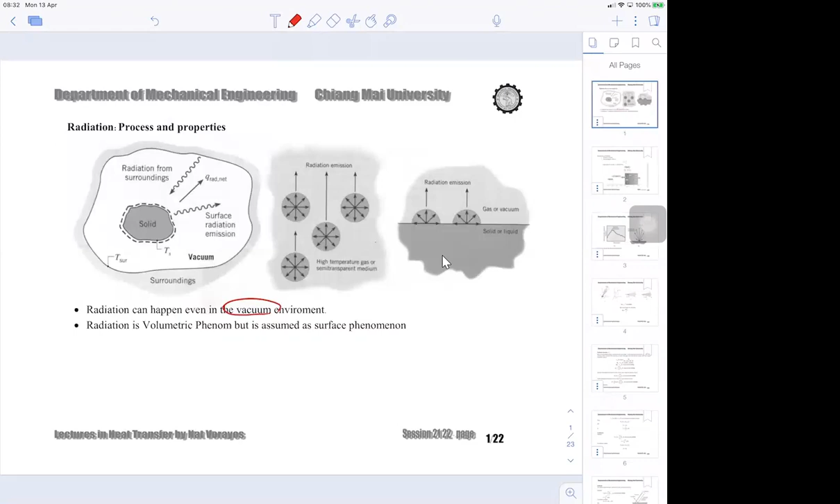Radiation process can happen even in the vacuum. Radiation process is actually a volumetric phenomena, meaning every element of the subject can radiate. But in this chapter, in this class, we're gonna talk as if it was the surface phenomena. So there's gonna be no radiation from the inner side of the object.

The radiation is going to be radiated from the surface only. Even if you have a 3D object, it's going to be represented as the surface. So surface can radiate.

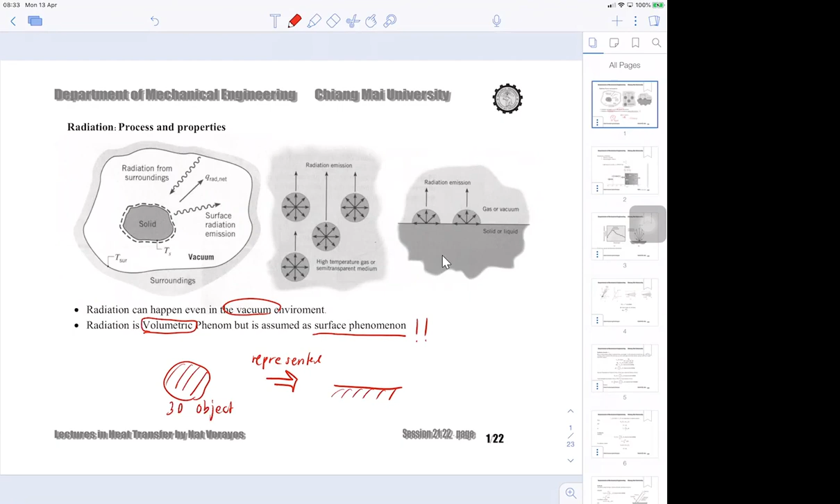The way it can travel through space without a medium is that the radiation, the energy transforms itself into the electromagnetic wave, and then when it arrives to destination, it's turned into heat. So the whole process is called radiation. It has to be the conversion of the energy into electromagnetic wave, and it's going to be the electromagnetic wave converted into the heat.

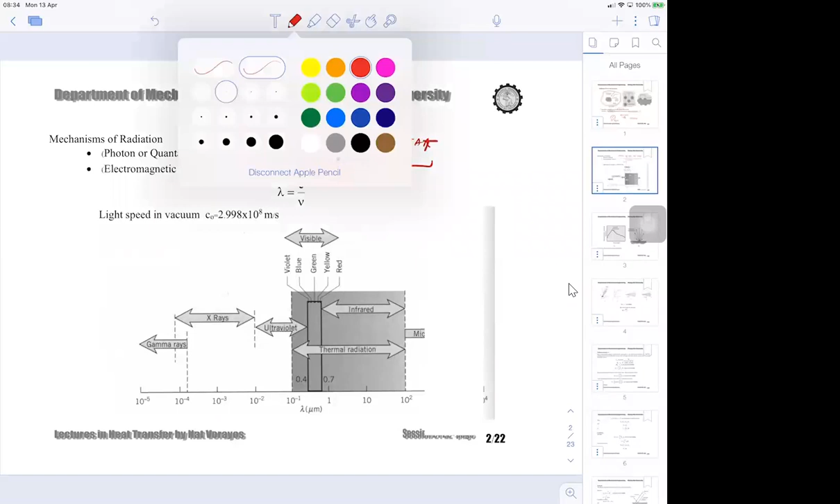So it maintains all kinds of the properties of the wave. It has velocity, it has the wavelength, and it has the frequency. A number of frequency or wavelength can be transmitted from the subject itself. So the number of wavelengths that we have, it's so many. We call this property the spectral.

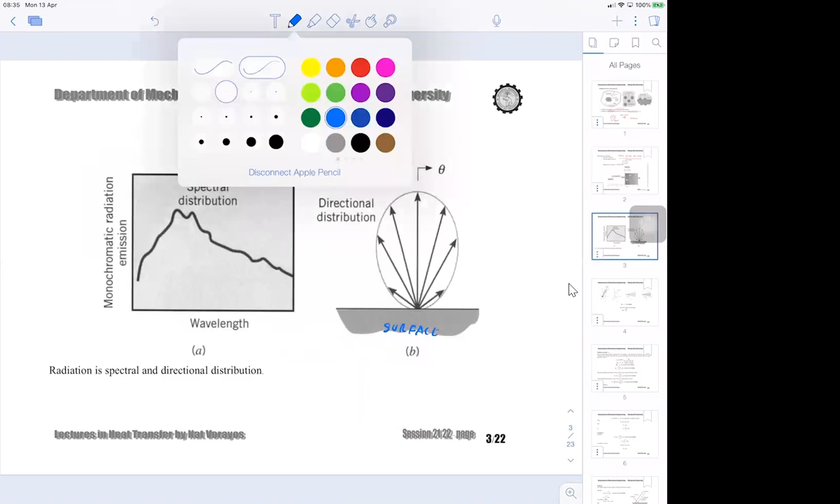So we talk about the direction of the distribution too. For example, this is a surface, and one point on the surface itself can radiate, sending out energy in many directions. To say the truth, it is in every direction upward into the surrounding medium, and the amount of radiation can vary. It can be maximum in this direction, minimum in that direction.

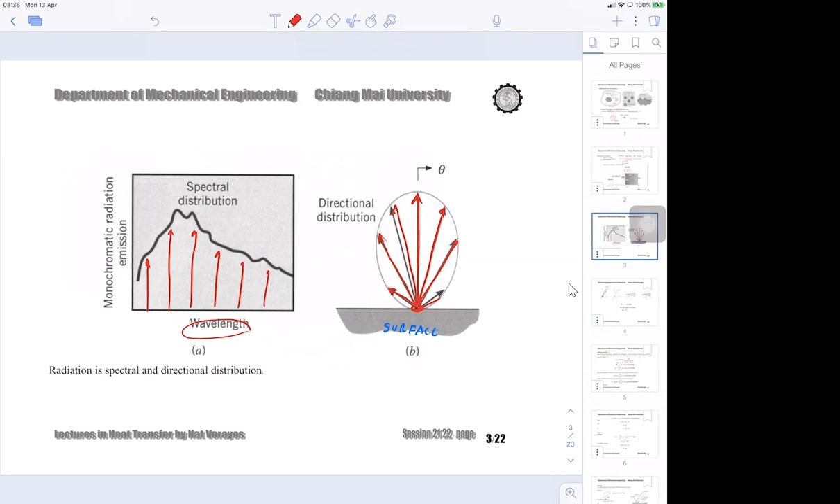It can vary in terms of wavelength too. The intensity of the radiation is on the y-axis, and the wavelength is on the x-axis, so it can vary.

And we define the radiation intensity - this is the emission. When you have a surface at temperature Ts, and Ts is greater than 0 Kelvin, it always radiates energy out. We would like to measure that energy - that energy we call emission.

So we specify what's called the radiation intensity, which has a unit of watt per meter square per 3D angle, which we call steradian, and per wavelength.

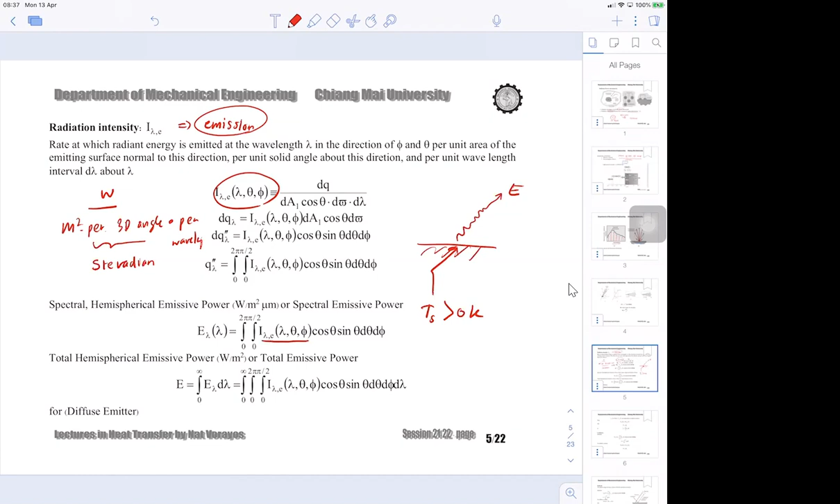So when we make the integration over the intensity - for example, this is the intensity - we make the integration in every direction. This is a concept that we talked about last time. This is the integration of intensity.

Integration of intensity to sum it actually, to sum our intensity in every direction. If we do the integration like so, what we're gonna have is not just intensity in one direction or one wavelength, but in every direction. This is energy emitted in every direction.

But still, the energy that we carry out from the integration is going to be specified at one lambda. If you want to make the integration once more, you can take this energy in one wavelength under another integration. Now it's going to be integration from 0 to infinity of lambda, meaning you can study the radiation of the energy in terms of emission from 0 to infinite wavelength, including all wavelengths. This is energy in every direction and every wavelength.

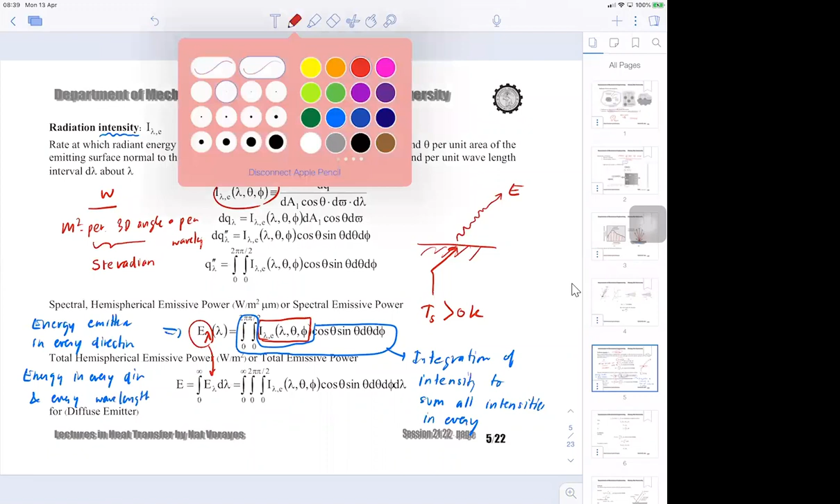So you're gonna have the equation which is important - this equation.

And we talk about the diffusive emitter - that's a whole other concept. I would not go into the detail because we already talked about it last time. This is a quick recap.

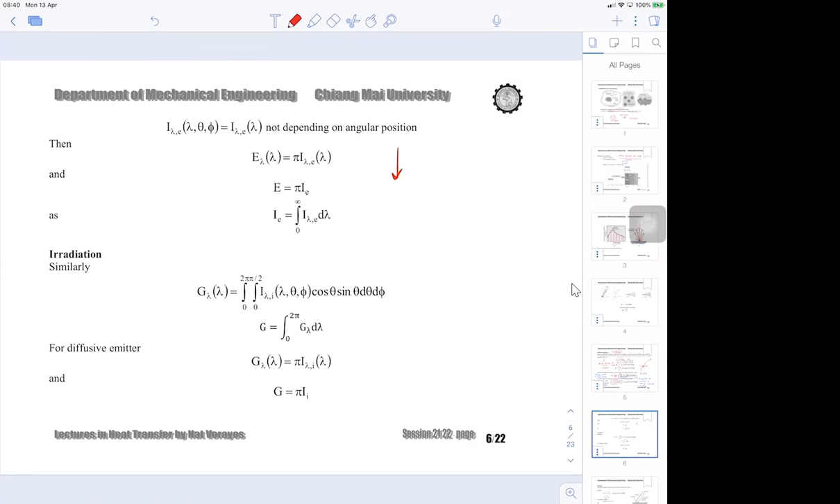Another phenomenon in addition to emission is irradiation. We use the concept G, the symbol G, and we use G lambda, meaning that it is irradiation onto an object at one particular wavelength.

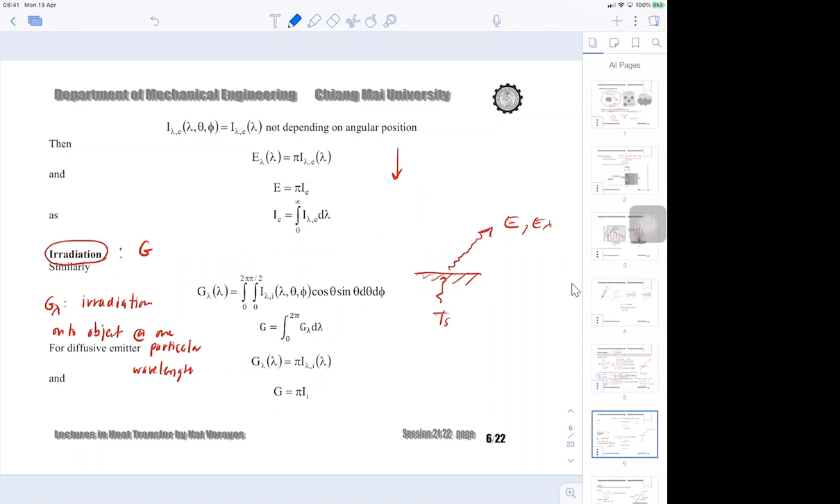What is the irradiation again? If you have a surface at Ts, of course you can have emission. But the surrounding or another object is going to have emission too, and part of that emission arrives at surface Ts - this is G. You can study the radiation arriving at the object in terms of G, which is the irradiation in every direction and every wavelength, or G lambda.

G lambda is the irradiation in one wavelength. But G is every wavelength. So the important equation would be that.

And then we talk about radiosity. We use symbol J, and we have J lambda. Similarly, it is the quantity measured at one wavelength, and we have J, which is the quantity measured in every wavelength and in every direction.

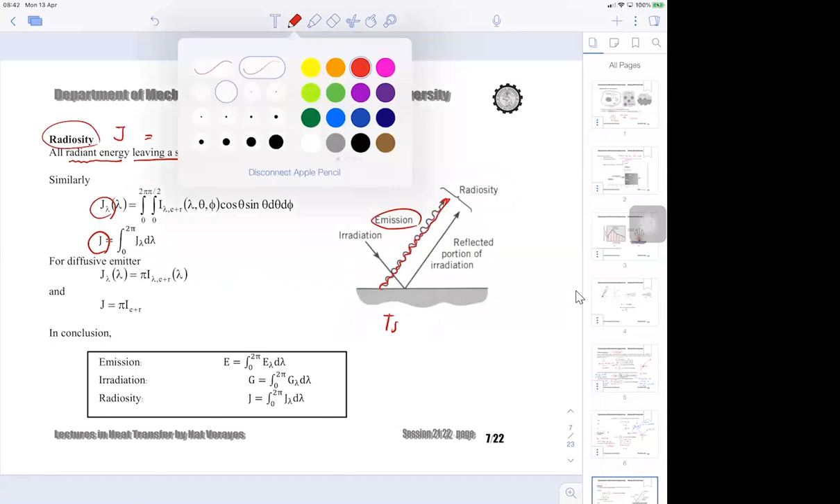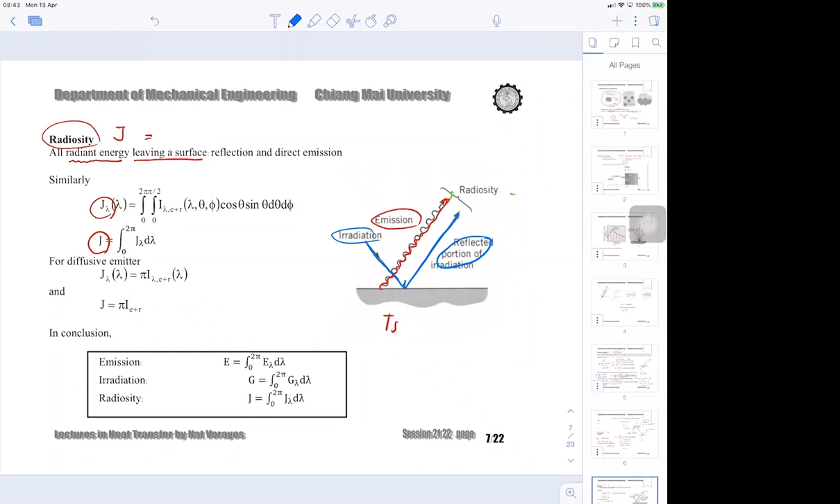We're going to have the radiation and it's going to be reflected. So the summation of emission and reflected radiation, we call it radiosity. As you might guess, the important equation would be something like that. So in conclusion, emission can be found from this equation, irradiation can be found from this equation, and radiosity can be found from this equation.

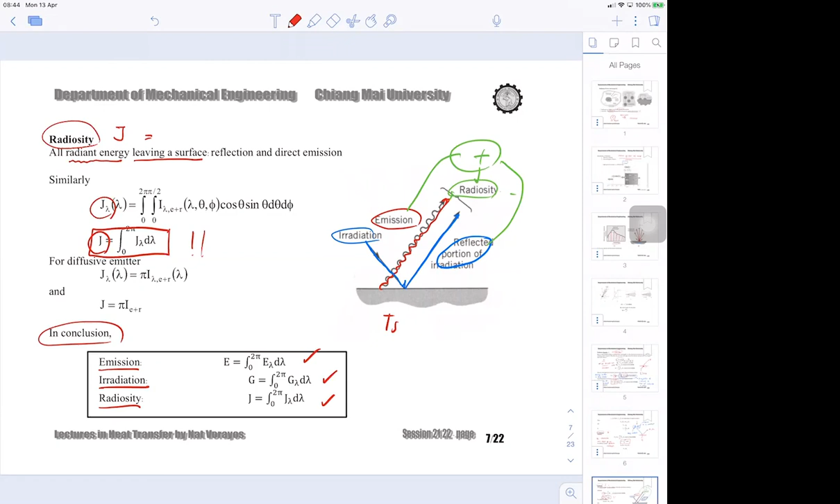And then we get back to I lambda e. This is the emission intensity. Because when you have a surface and the surface itself is at temperature Ts, you need to find the emission intensity in order to find how much the emission is, using this emission intensity in order to find the whole emission, or at least you would like to find E lambda.

So I give you the radiation of black body, because the black body itself is the ideal material. It can absorb all the incident radiation, 100% of the radiation onto it, in every direction, in every wavelength.

When you talk about the emission, if you have two bodies, one black, one real, and they are at the same temperature, when you measure the emission out of these two, the emission from the black body would be the most. No real body can emit energy more than the black body if they are at the same temperature. No surface can emit more energy than black body. Black body is a diffuse emitter.

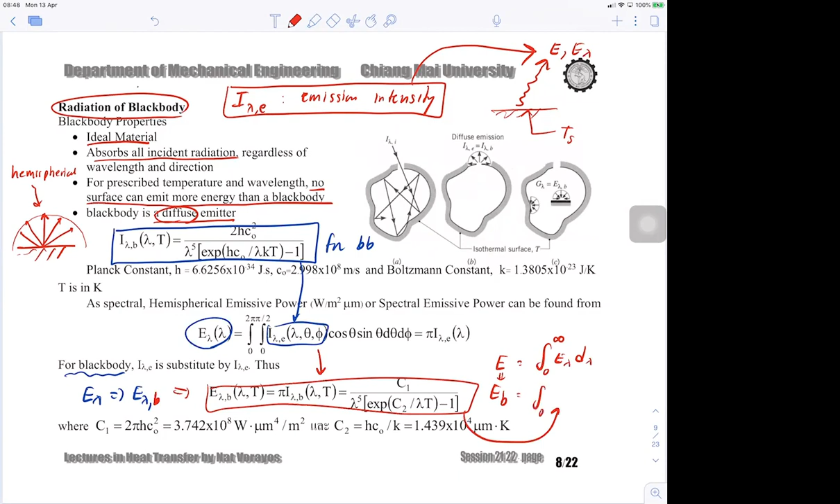This equation becomes this, because you know, if you want E, it's the integral from 0 to infinity of E lambda d lambda. So for black body, EB, we call E for black body by putting subscript B in, meaning this belongs to the black body. It's equal to the integral of something like this, and after the integration, this is what you have. So EB equals sigma T to the fourth.

And then we define the ratio of emission from wavelength 0 to lambda, meaning that we're going to find the amount of energy from 0 to lambda of E lambda B. Basically this is EB, but you don't make the integration from 0 to infinity. What does it mean? It's the part of emission from lambda equal to 0 to lambda equal to the amount you specify, in comparison with the same integral but from 0 to infinity of E lambda B, which is the whole emission in every wavelength. On the top is part of emission from wavelength 0 to some lambda.

So if you compare this ratio, we call it the black body radiation function, F0 to lambda, because the bottom is equal to sigma T to the fourth. On the top, it is the integral. You can take the sigma T to the fourth inside the integral, because this is the constant.

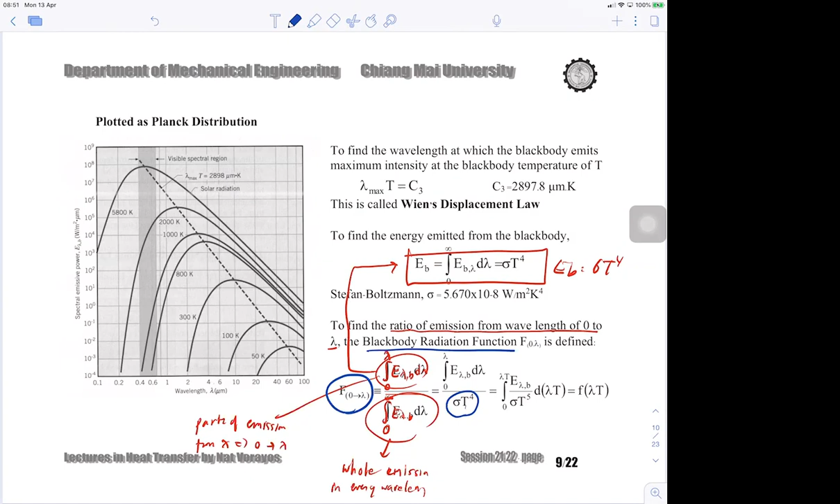Then if you want to find this ratio, you don't bother to make the calculation by yourself. It's already tabulated. So this is the table to find F0 to lambda. All you need to know is lambda and T. You find the product between these two, and see where you are. If you are here, you can read the F0 to lambda right away. And it happens that, let me write it down.

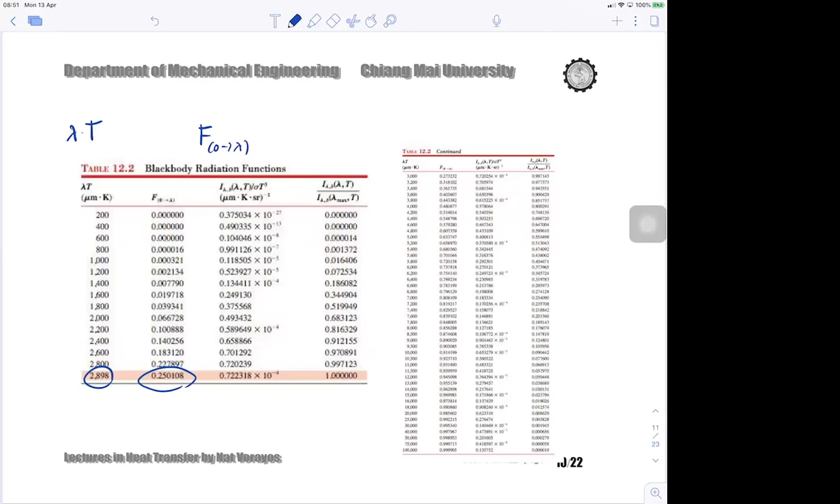Oops. Sorry about that. Okay.

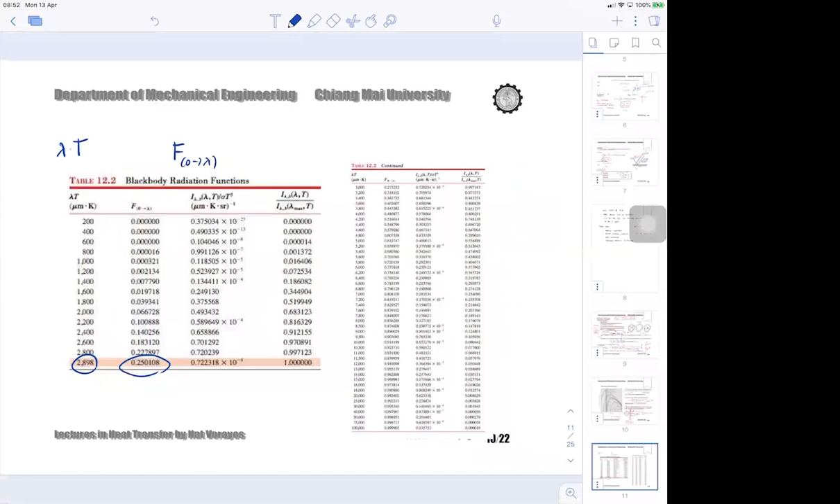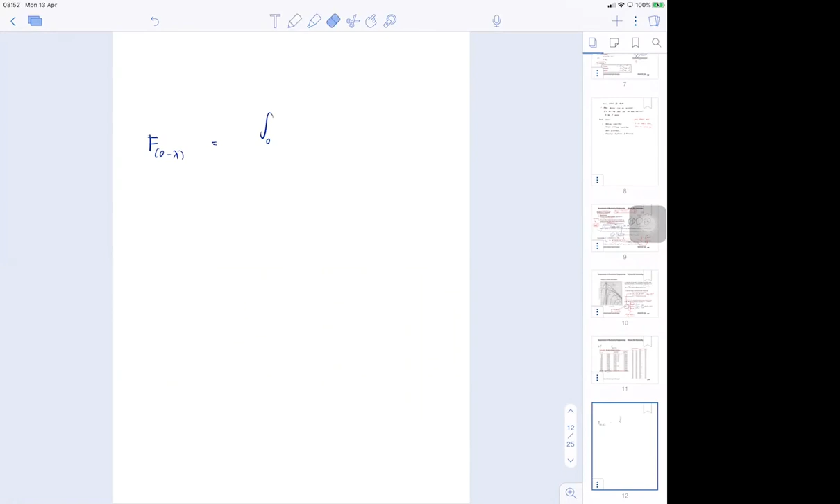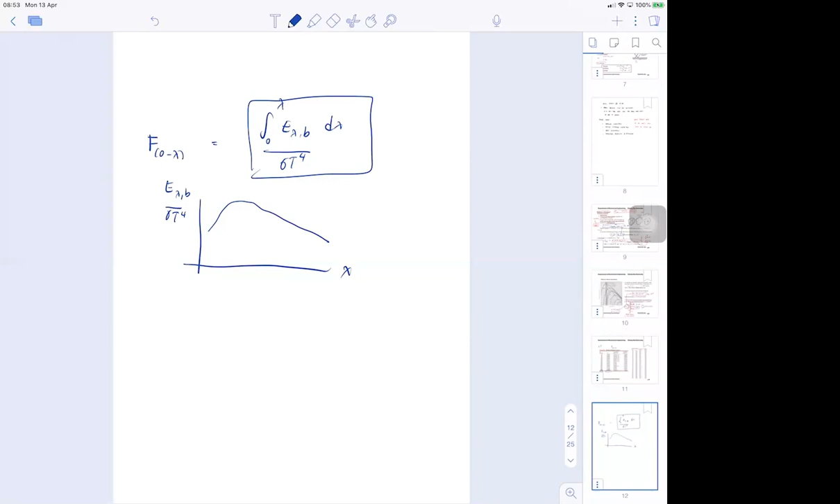Because when you draw the F0 to lambda, it is the integral from 0 to lambda of E lambda b d lambda over sigma t to the 4. Basically, it is the integral of E lambda b over sigma t to the 4, with lambda on the axis. If you have a property and the characteristic of E lambda b over sigma t to the 4, it looks like the graph shown in the sketch in front of you right now.

So this integral means finding the area under this curve.

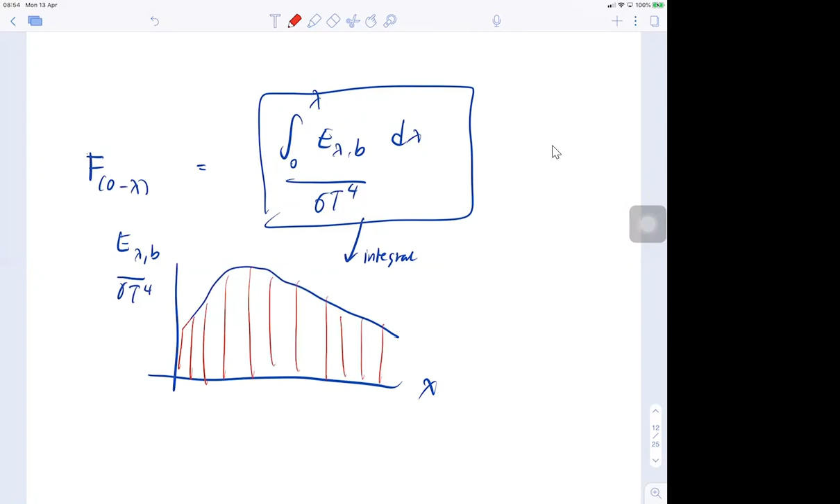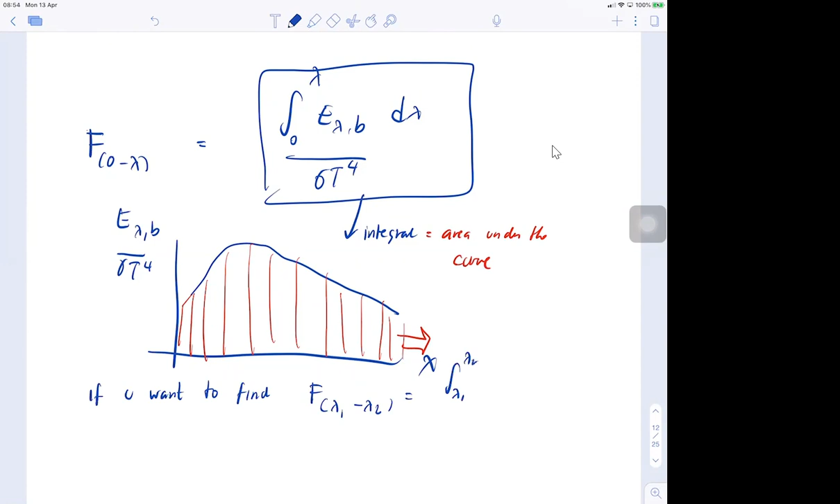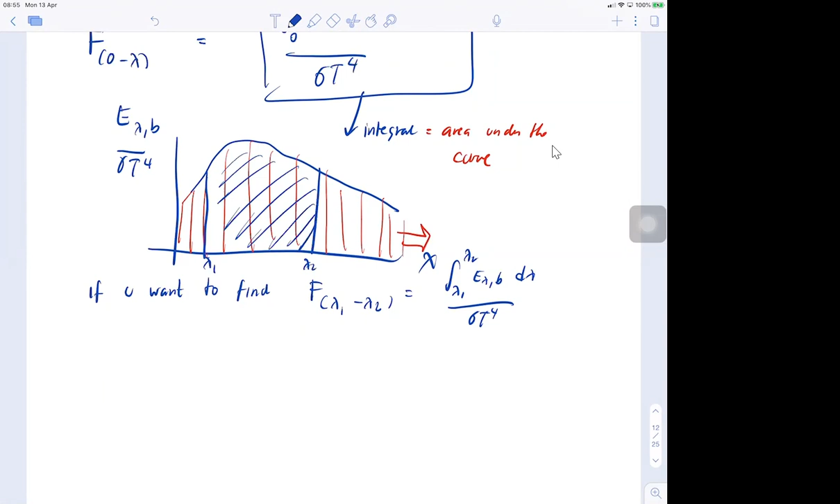Sometimes if you would like to find the F from lambda 1 to lambda 2, meaning you need a portion of the integral from lambda 1 to lambda 2 of E lambda b d lambda over sigma t to the 4, you're trying to find this portion between lambda 1 and lambda 2. How do you make that calculation?

You can do that by finding that f lambda 1 to lambda 2 equals f from 0 to lambda 2, meaning you find the area. Let me make a color code here: green from 0 to lambda 2. And then minus - I need violet here - f from 0 to lambda 1.

Remember, you want the blue area underneath the graph, but how do you find it? You need the green area first - where is the green area again? Green area is from here to there, from 0 to lambda 2. Minus the violet one, the pink one, from 0 to lambda 1. Where is that area again? Here, I'm sorry, here. So the green area minus the violet and pink area, what remains is the blue area. Is that what you want? Okay.

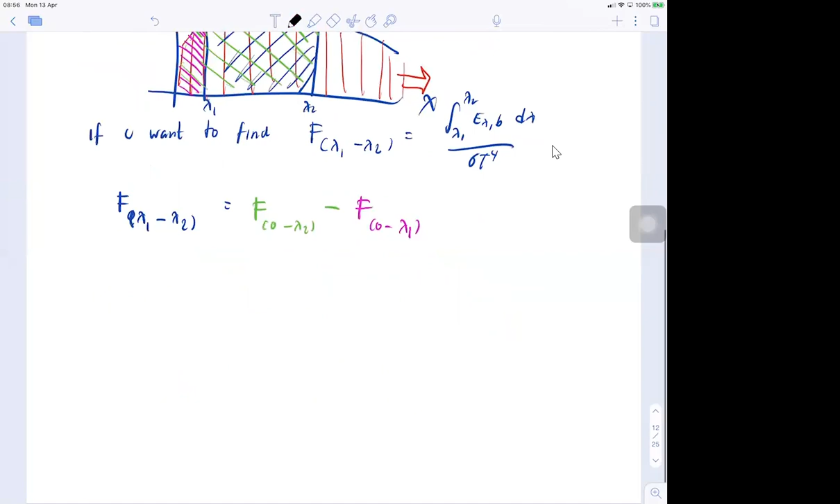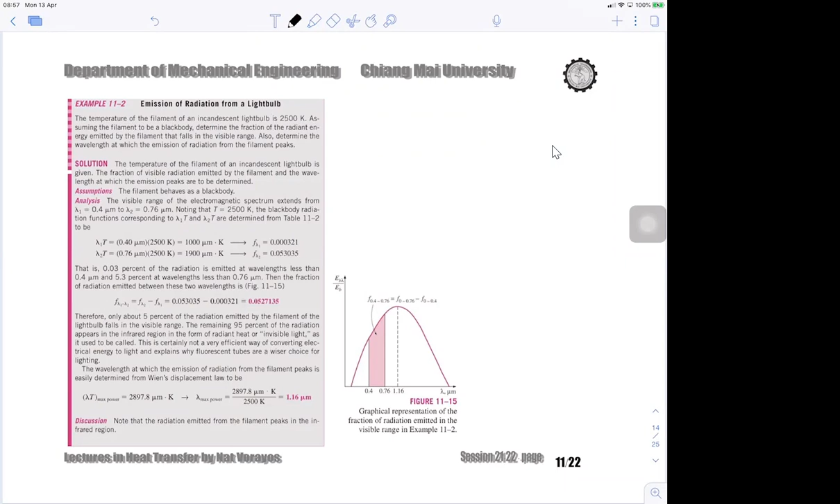We are coming to the example that you probably have in the book. It's called emission radiation from the light bulb. It gives the temperature of the filament of the light bulb as 2500 Kelvin, and you treat the filament as a black body. They would like to find the fraction of radiation energy emitted by that filament, for the visible range.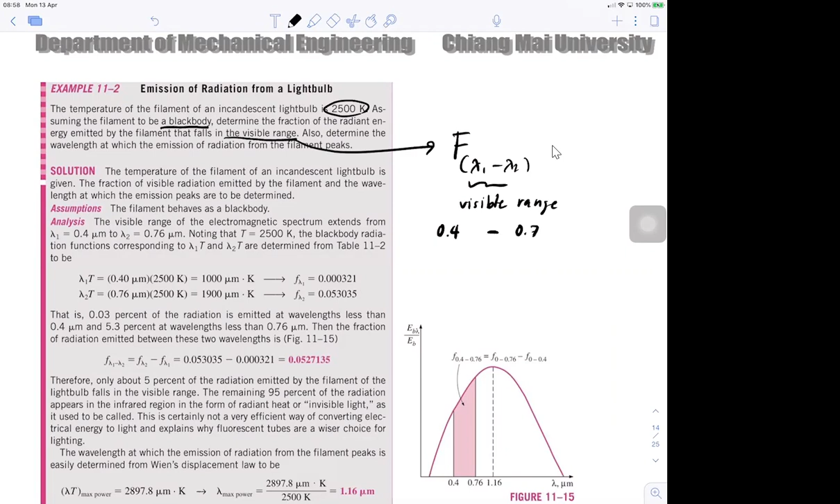So they need the F from lambda 1 to lambda 2, this is for the visible range, and the visible range starts from 0.4 to 0.7 micrometer. So if you have a graph like that, take a look at the graph on the bottom. The y-axis is EB lambda over EB, and note EB equals sigma t to the fourth. This is 0.4, this is 0.7, and you need the area.

So you need to find F from 0.4 to 0.7, which equals F from 0 to 0.7 minus F from 0 to 0.4. So in order to find these two, you need to find lambda 1 t for t's first, and lambda 2 t. I'm sorry, this is lambda 2 t and this is lambda 1 t. So lambda 1 equals 0.4 micrometer, lambda 2 equals 0.7 micrometer, right?

So they do it: lambda 1 equals 0.4 multiplied by 2500, this is what you have, and you use the table to read the fraction equal to 0.000321. And you find lambda 2, lambda 2 multiplied by t equals 1900, and the fraction is equal to 0.053035. Once again, you plug this in here and there, and you get the fraction. So the emission from the filament visible to your eyes is just a little bit above 5%.

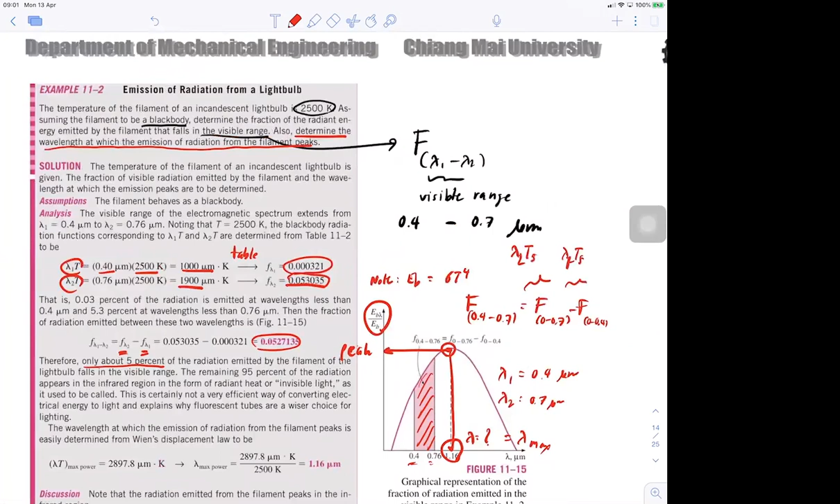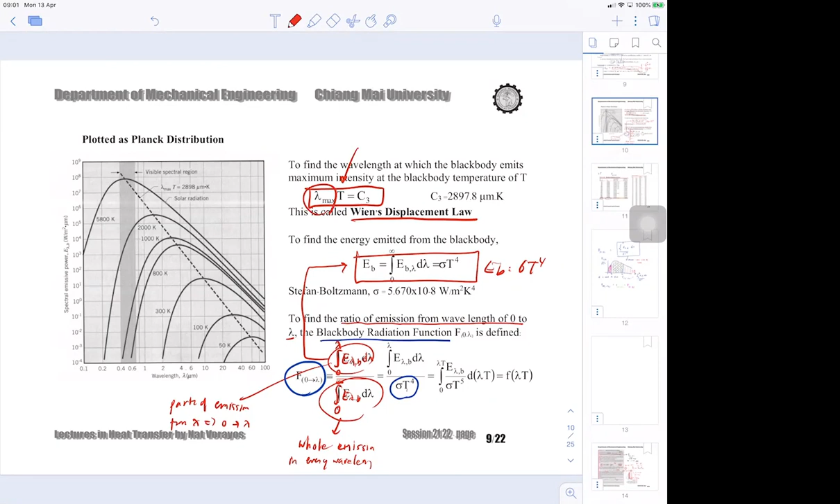In order to find lambda max, there is Wien's displacement law relation. In Wien's displacement law, you just plug t in here to get lambda max. C3 is a constant. So that is the example.

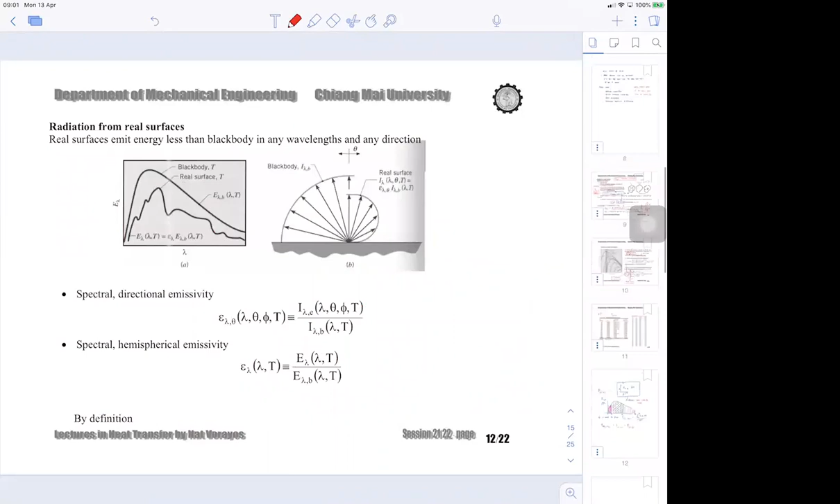And then if you take a look, get back to the radiation of black body again - we talked about emission intensity, but this intensity only gives you the case for black body. How about the real body? How do you find the emission from the real body? That's how we start from here: radiation from the real surface. You need to find, you want to find the emission.

E or E lambda, that's fine. Okay.

Last time when we talked about this, we started by identifying another property. We call this property emissivity. Emissivity is the property that compares the ability to emit energy over the ability to emit energy if the object is black.

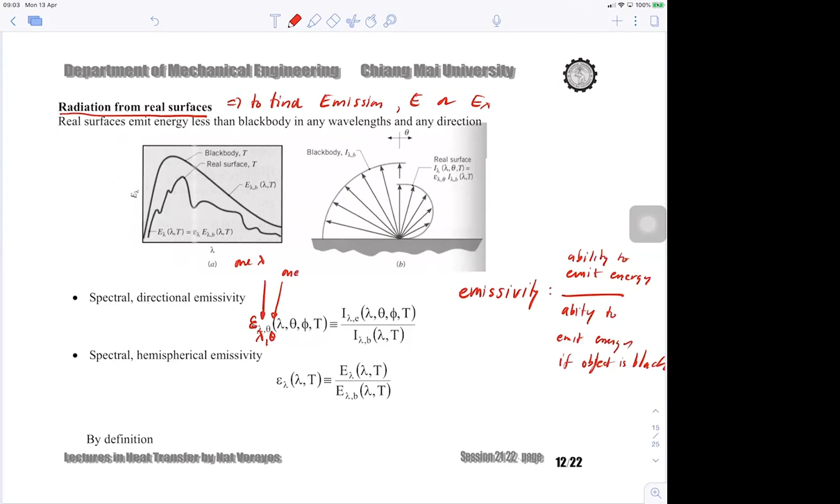So when you have emissivity epsilon with subscript lambda and theta, it means the ability to emit energy in one wavelength and one direction. You compare the intensity of the real body and the intensity of the black body together. If you study emissivity with lambda, this is the ability to emit energy in one wavelength, but in every direction.

And if you want to find just epsilon, with no subscript, this compares the emission of the real body over the black body, in every wavelength and every direction.

So from this equation, it's a comparison between E over EB. You know that EB equals sigma T to the fourth. If you want E, it's just epsilon multiplied by EB, meaning epsilon multiplied by sigma T to the fourth.

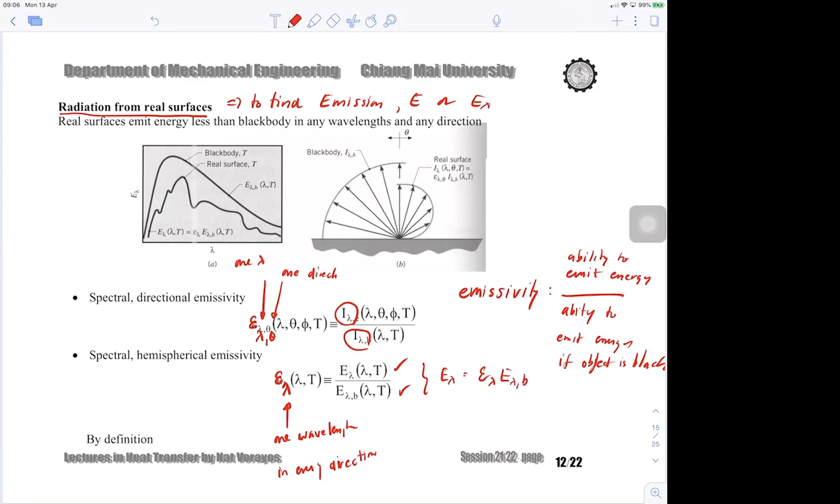How do we get this? From the last slide, this equation can be written as E lambda equals epsilon lambda multiplied by E lambda B. Remember this expression, and then the same thing.

Because we know that E equals the integral from 0 to infinity of E lambda d lambda, I just plug this in. I know E equals this, and I put it in here. This is what I have, and this one is sigma T to the 4. So my epsilon is equal to the integral from 0 to infinity of epsilon lambda E lambda B d lambda over sigma T to the 4.

If you ask me which one is important, the important part is this equation. You have to understand this point, okay?

Then, basically, epsilon most of the time depends on the wavelength. For example, take a look at this plot: on the y-axis is epsilon lambda, with subscript epsilon lambda n meaning normal direction. If you have the surface, this is the radiation in this direction, 90 degrees to the surface, and this is the radiation in terms of wavelength.

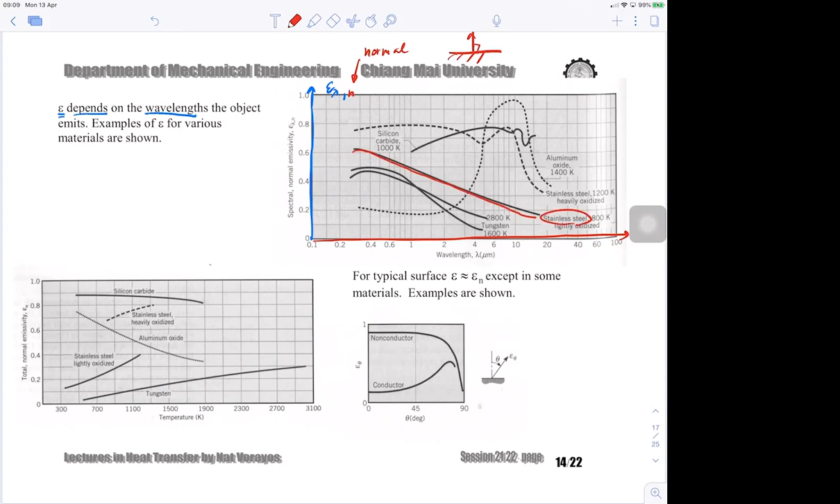So the amount of emission varies in one substance. For example, this is stainless steel: it emits energy at 90 degrees at every wavelength. At wavelength 0.4, at wavelength 0.7, this is the visible range, so they're not equal. But for a typical surface, we hold epsilon approximately equal to epsilon n, no matter how it varies.

You can browse the back of the book to check the epsilon for each material. Make sure you know how to get the number from the appendix in terms of epsilon.

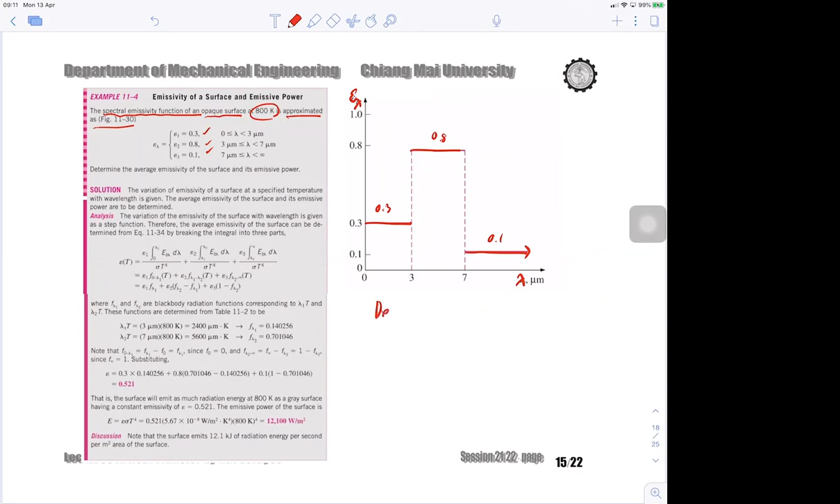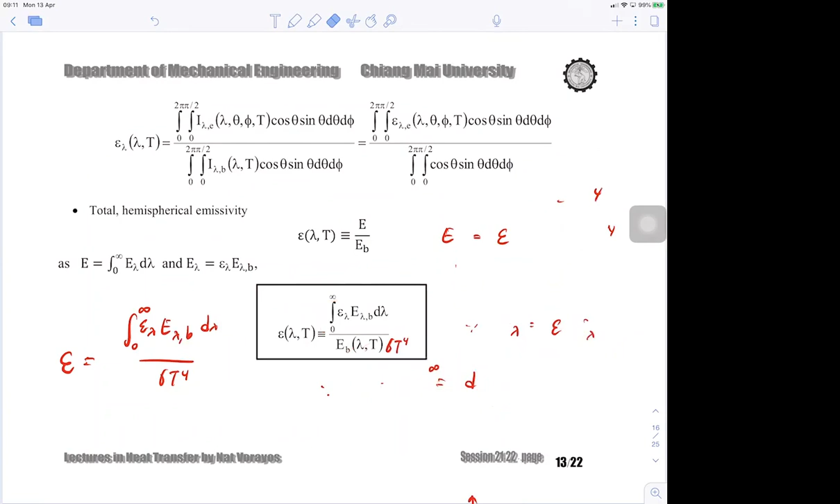So then they ask you to find epsilon, and also to find the emission. This is the emissivity, found by the equation - take a look at the equation. The emission is given by this equation. So in order to find that, let's get back to that page.

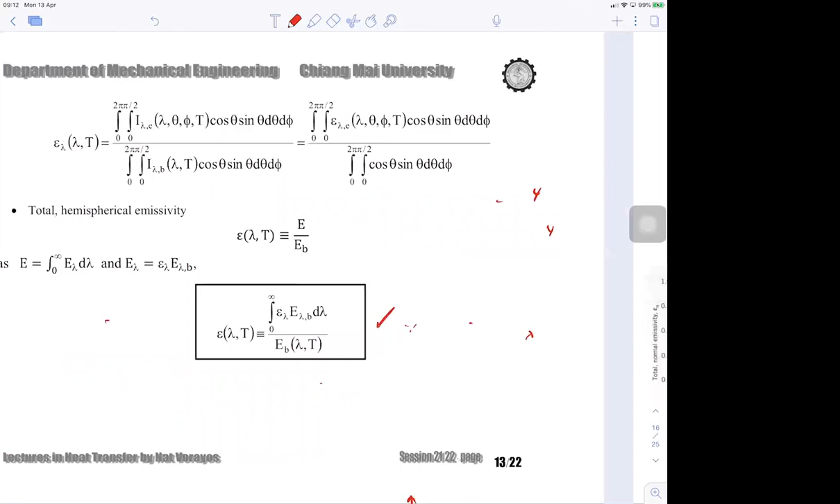So you need to find epsilon. Epsilon is the integral from 0 to infinity of epsilon lambda multiplied by E lambda B, d lambda, over sigma T to the fourth. So you need to find the products.

What I mean by product of this thing. The integration would be range 1, range 2, range 3. So you started out with breaking the integration into 3 regions.

Epsilon going to be equal to, for the first region, the epsilon is constant as 0.3, so you can take the 0.3 out from the integral, something like that. Epsilon 1 multiplied by integral of 0 to lambda 1, e lambda b d lambda over sigma t to the fourth, and do the same thing for the second region and the third region.

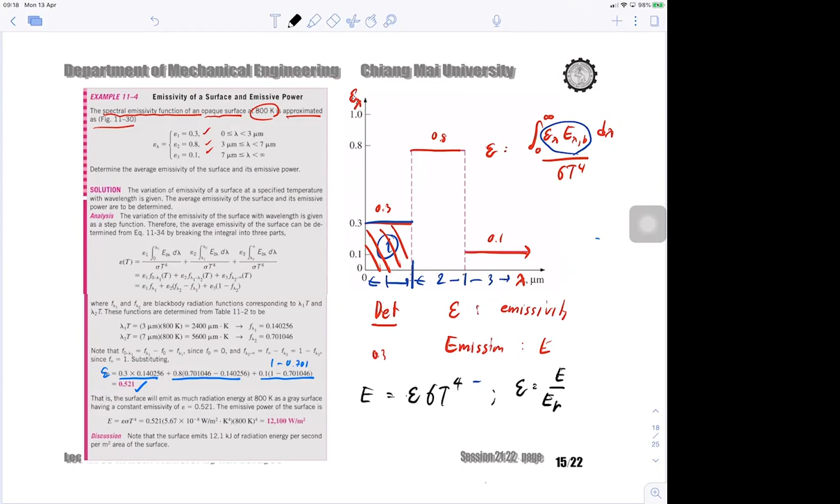Emission, let me clean it up first. So emission is something like epsilon multiplied by sigma t to the 4th. Why is that? Because epsilon is equal to E over EB, and EB is sigma t to the 4th. I just rearranged the equation.

So my epsilon, I already know it is 0.521. Temp, I already know, at 800 Kelvin. Remember, this should be in Kelvin -- if it's given in Fahrenheit or in Celsius, you have to convert it into Kelvin first. So you're going to get E. Substitution is going to give you E equal to 12,100 watt per meter square.

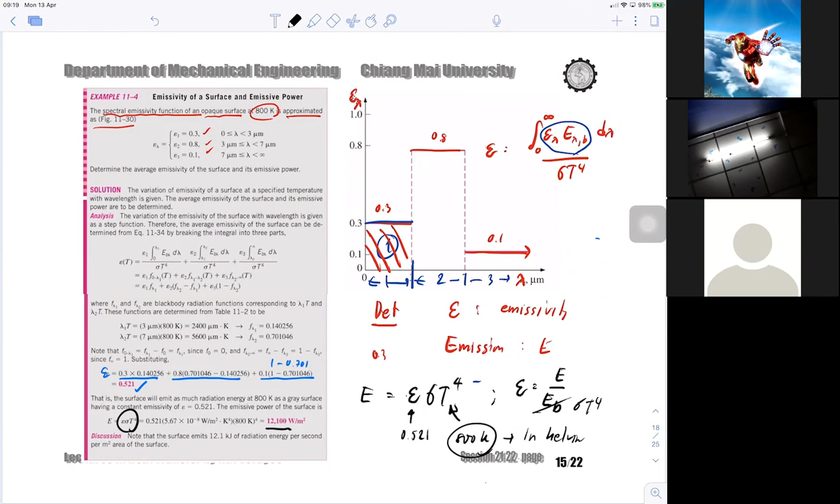So that's the example. Now we're going to step up and talk about more on the ability, more properties. The property connected with the phenomena is the phenomena of absorption, reflection, and transmission.

If you have the subject, or the object of interest, it doesn't matter whether it is 3D or how it looks like, but we represent it by the surface. So this is the surface, and basically it's like the glass.

And the phenomenon is something like this: you're going to have the radiation coming in. And once it arrives at the surface, it has three choices. The first choice is get reflected. Second choice, absorb. Third choice, transmitted. If the radiation coming in is G lambda,

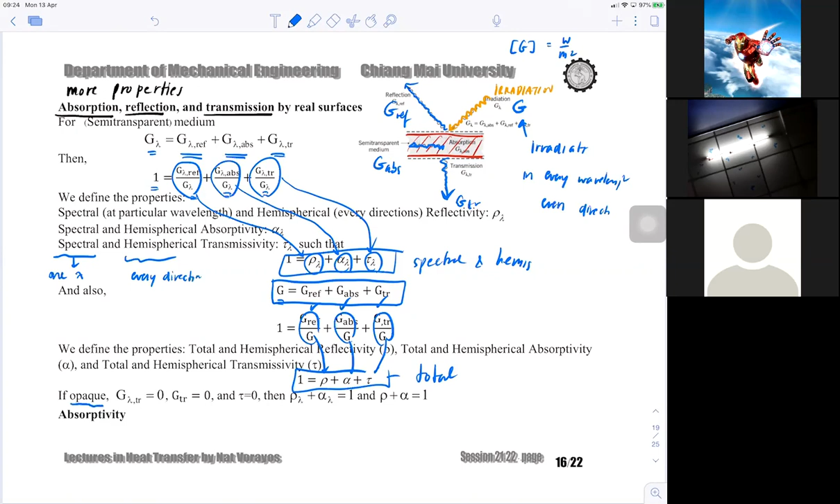If the object is opaque, meaning no transmission, G lambda transmission equal to 0, G transmission equal to 0, tau should be equal to 0. So what remains is rho lambda plus alpha lambda equal to 1, because tau lambda equal to 0. Likewise, rho plus alpha equal to 1.

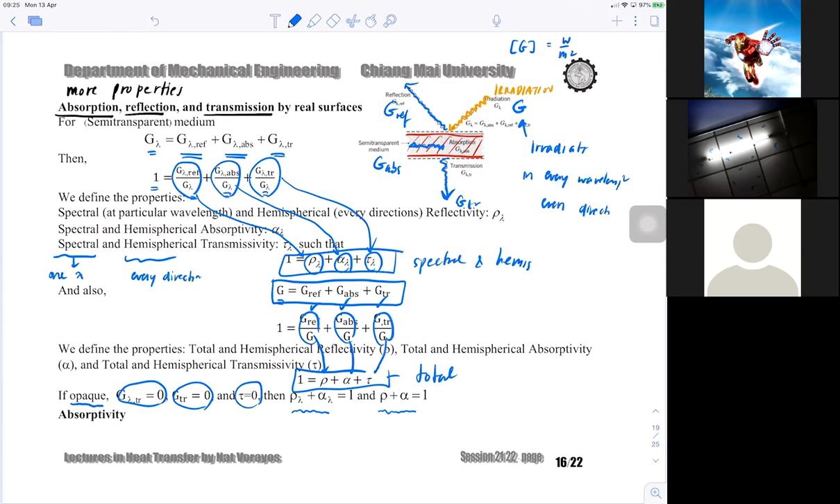So that's the concept. Then we're going to talk about absorptivity. Now that you know how to find G lambda, you should know G. Absorptivity alpha and alpha lambda and alpha. You would like to find the property alpha lambda and also alpha. So what is it again? Well, for hemispherical absorptivity, you need to find the...

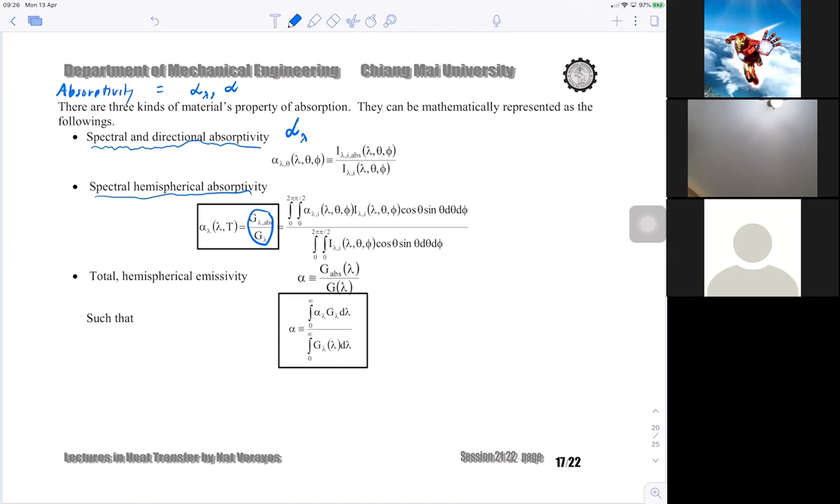G lambda absorption over G lambda of radiation, right? So it's starting from having the spectral directional absorptivity, meaning that we're going to have to define from the beginning: alpha of lambda and theta. This is absorptivity at one lambda and one direction. How do you find that?

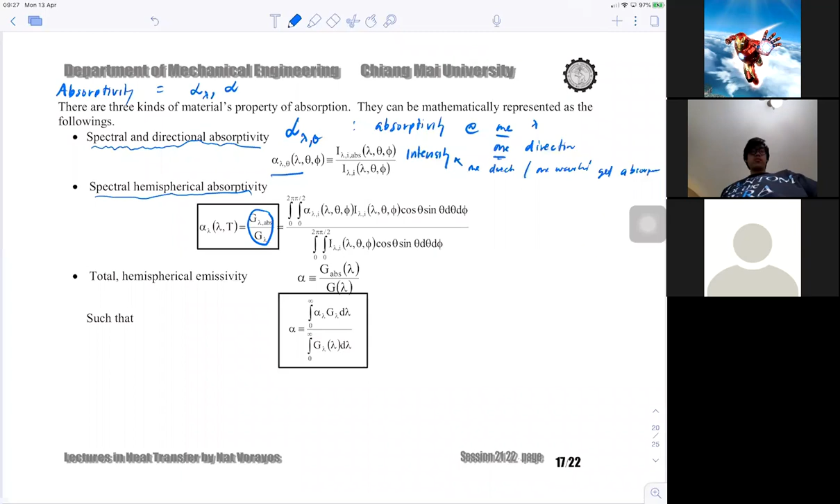This property, in comparison with the intensity. But intensity in one direction and one wavelength, which gets absorbed, over the incident of all radiation. Okay, if I rewrite this equation, let me get it in red. I lambda I ABS is going to be equal to alpha lambda theta multiplied by I lambda I.

I lambda I, okay, so this is the intensity in one direction, in one wavelength. So if I put this thing and make the integration twice, with respect to cos theta, sin theta, d theta, and d phi, I'm going to have this equal to G lambda. And over here is going to be the same, the radiation at one wavelength.

Let me clean it up first. So I redo it again for this equation. I know that G lambda that gets absorbed is equal to alpha lambda multiplied by G lambda.

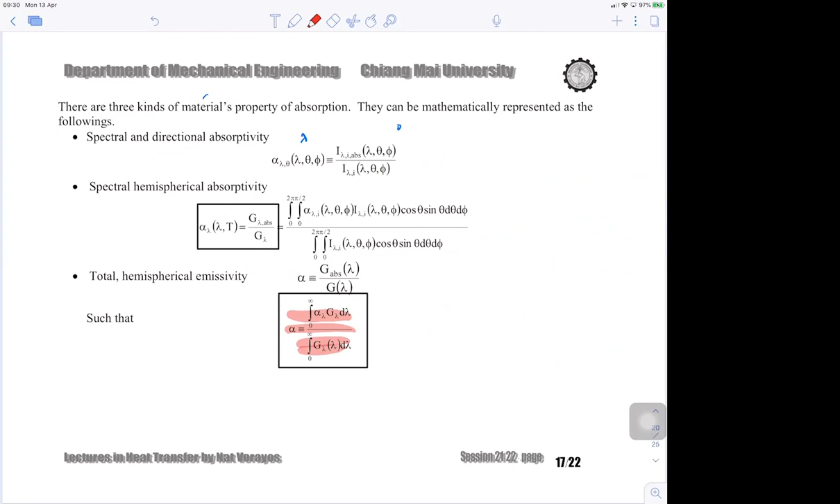Okay, if you ask me which part of this page is important, which part that I should know, I'm going to give you just only one equation to remember by. So that equation would be this.

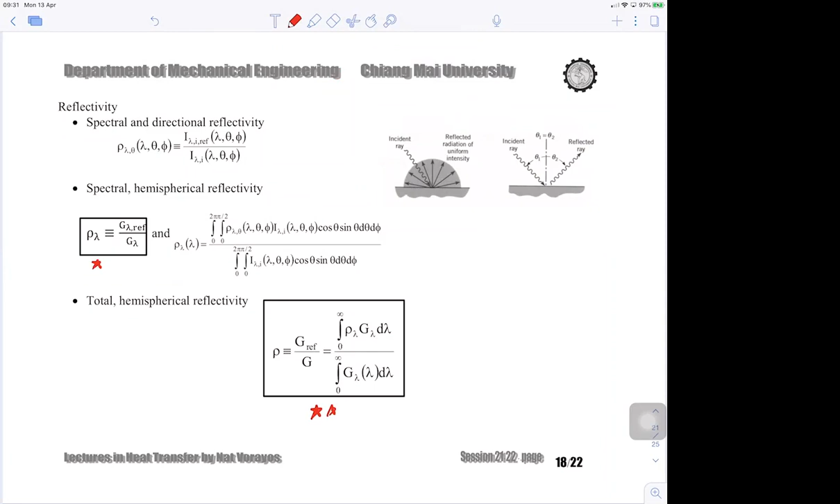Okay, the important part is this equation and that equation. You follow the same footstep once again for the reflection, what you're going to have is this equation and that equation. And you follow the footstep for the transmissivity, you're going to get this one and that one. So three sets of equations, they look similar, but not the same. But the way we derive it, it follows the same manner.

Okay, so right now, your ability would be the ability to find epsilon, rho, alpha, and tau.

So epsilon would be: make the integral from 0 to infinity of epsilon lambda and E lambda B, d lambda, over sigma T to the fourth. And you know how to find alpha. Alpha is the integral from 0 to infinity of alpha lambda and G lambda, d lambda, over the integral from 0 to infinity of G lambda, d lambda.

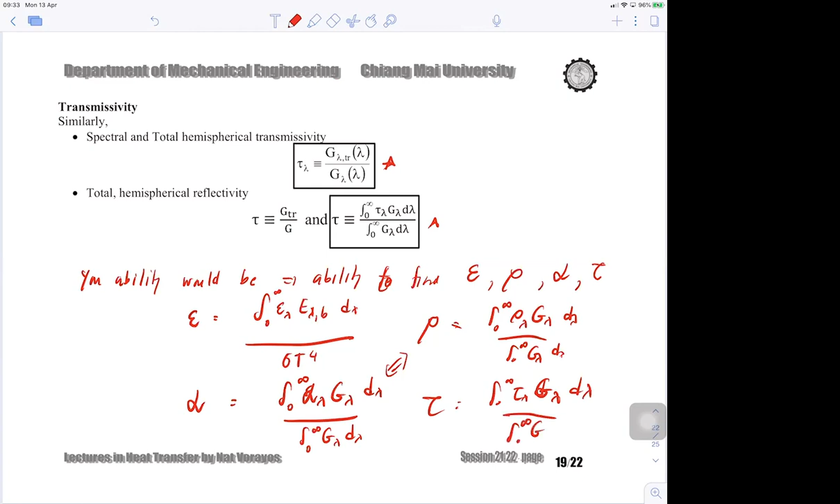Rho, well, you write the equation similar to that, you're going to get integral of G lambda, rho lambda, d lambda over integral from 0 to infinity of G lambda, d lambda. And tau equals... If you ask me what kind of equations are important to this portion of the chapter, this is the four important parts: one, two, three, and four.

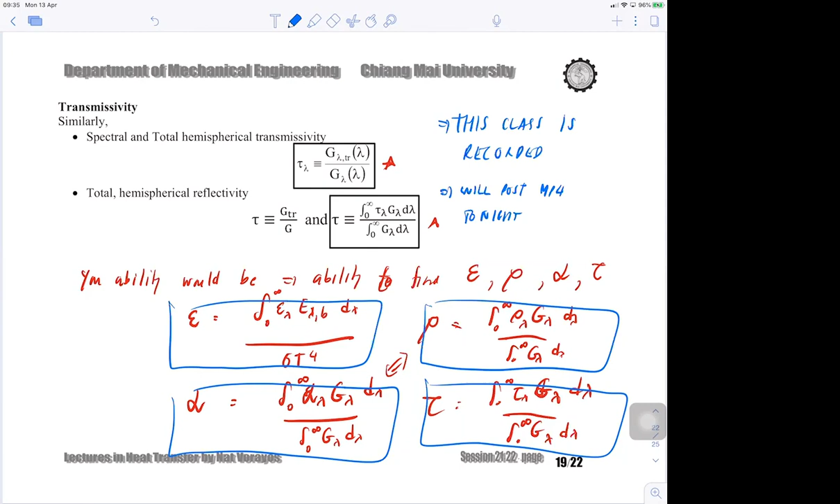In the book, there will be a graph showing each property, depending on wavelength. Most properties depend on wavelength. See the wavelength, this is tau lambda, this is rho lambda, and this is wavelength. The graph is not a straight line, it's wavy, meaning it's not constant at all. That's the concept, just to show how dependent the property is on the wavelength.

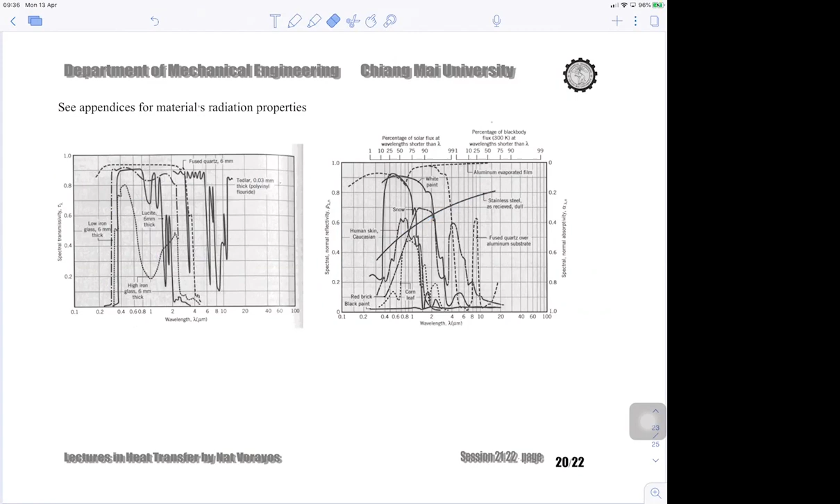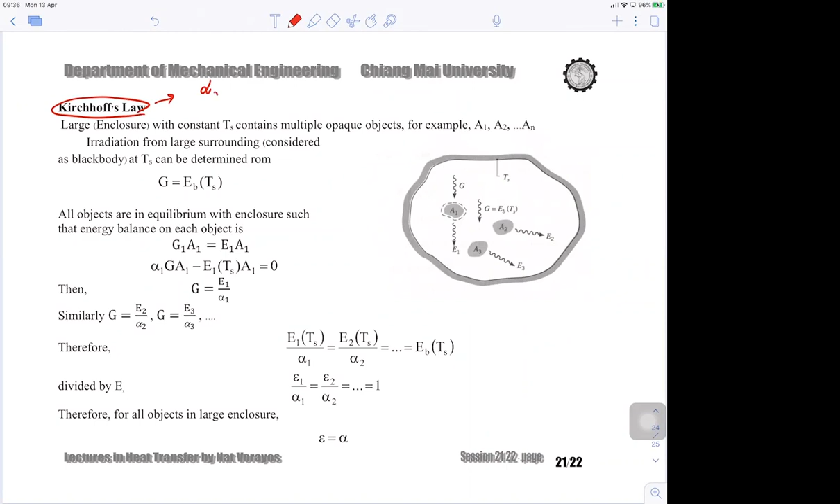That brings me to the next concept, which is the Kirchhoff law. What is the Kirchhoff law? At the end, you're going to have the conclusion that alpha lambda is equal to epsilon lambda. Spectral absorptivity is going to be equal to spectral emissivity. And also absorptivity is going to be equal to emissivity. In what condition?

However, if you are people standing on the ground, and above you there's nothing but the sky, then take a look at the geometry of what you're standing in. It's not like a tank. This is a tank, this is the obvious enclosure because it is a tank, right? It's so obvious. But when you stand on the ground and are surrounded by the sky...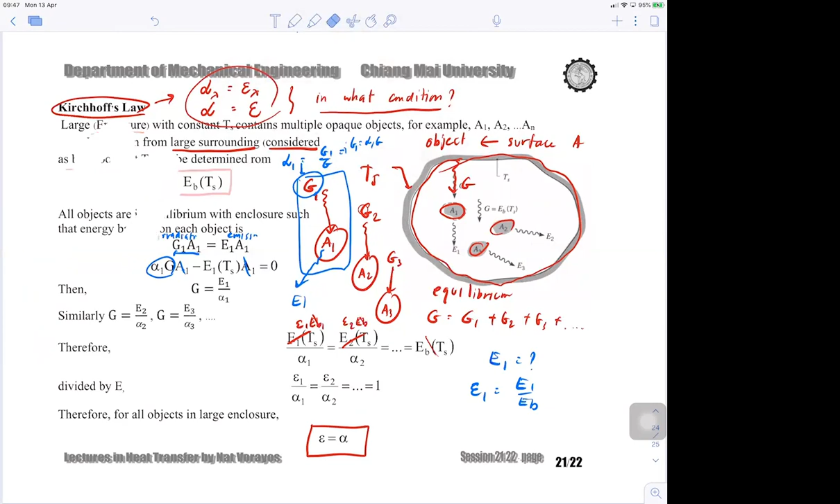Let me erase everything here real quick. So in what condition? In enclosure, in equilibrium enclosure. So what's next?

You can do it the same way by starting off with G lambda, and this thing will emit E lambda 1. You can make a proof that epsilon lambda is going to be equal to alpha lambda. But I'm not going to repeat it myself, it has the same concept, but take a look at the irradiation in terms of spectral, in one wavelength. So it's going to be the same.

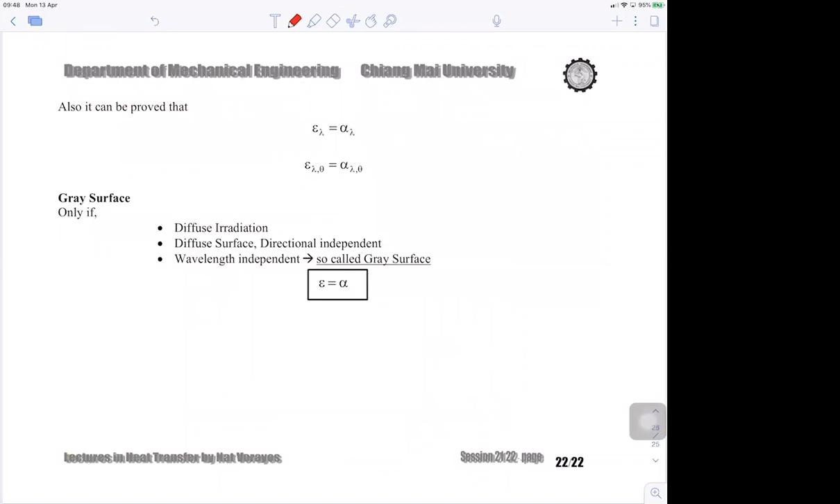Move to the next slide. You can go on to epsilon lambda theta, meaning in one direction. This is for one direction and one wavelength. This is every direction and one wavelength.

And also you have to take a look at the fact that it has to be diffuse irradiation too. The surface itself has to be diffuse, directionally independent, wavelength independent, and this one is called epsilon equal to alpha when the body is gray, diffuse, and wavelength independent.

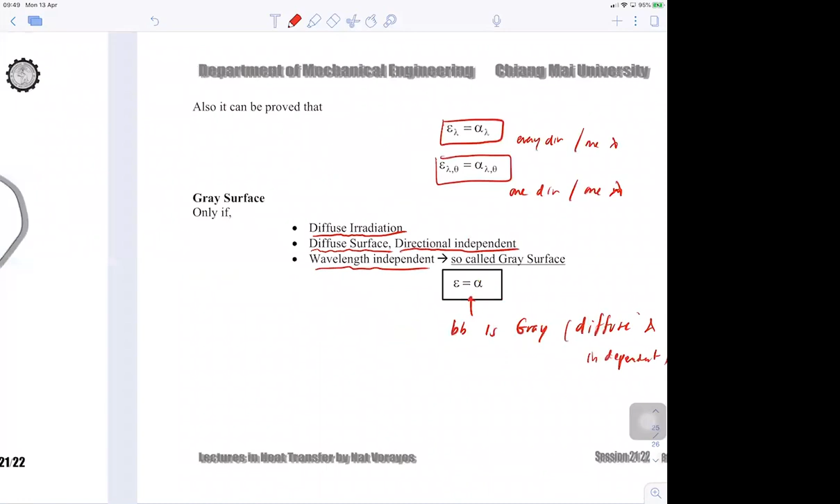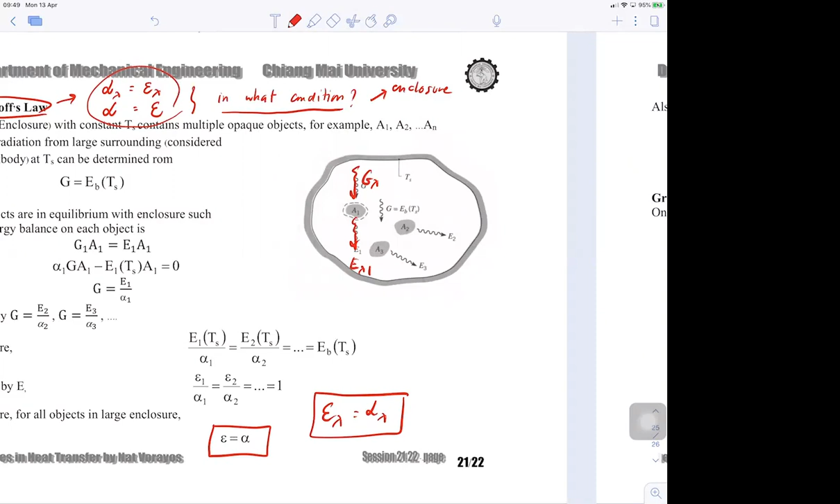So going back to the previous slide. In what condition? I'm sorry, my pen doesn't work, I don't know why. I'm sorry about that. In what condition? It has to be inside the enclosure and the object has to be a gray surface.

When you talk about gray surface, what is it again? It's diffuse and wavelength independent. Okay, that's the Kirchhoff law.